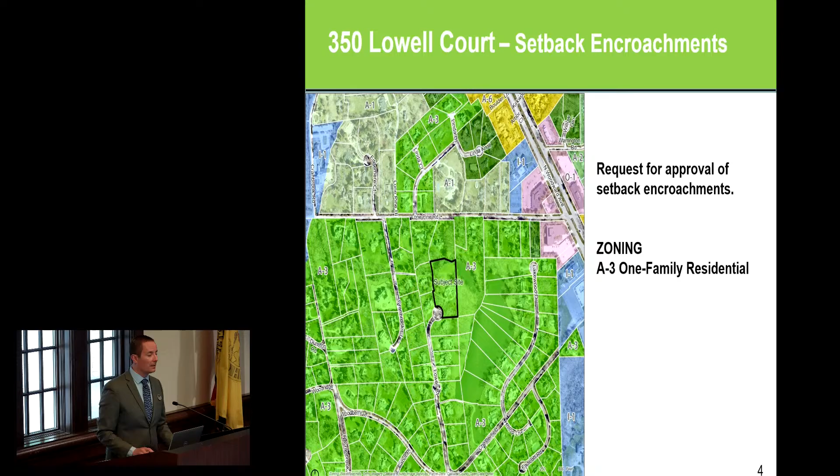Good afternoon, Mr. Chair and members of the Zoning Board. My name is Eric Peach with Giffels Webster, the city's planning consultant. Our first item for consideration is the home at 350 Lowell Court. As stated, this is for setback encroachments. The subject site is located at the end of Lowell Court at the cul-de-sac. It's zoned A3, so the A3 zoning district requirements and standards apply.

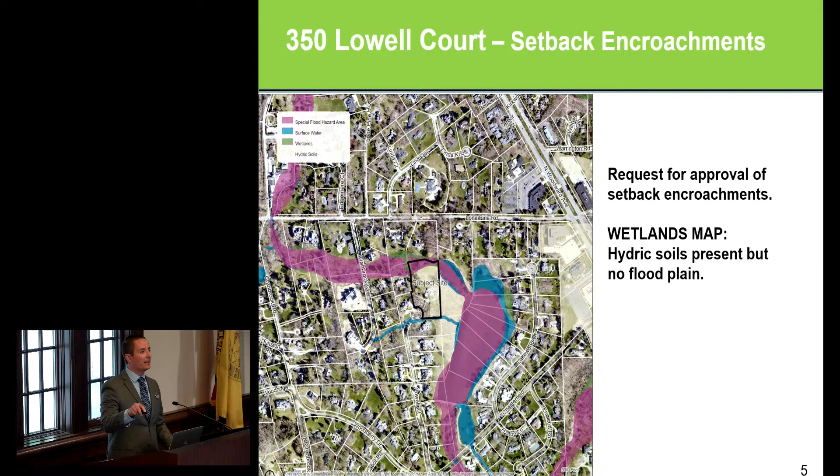An aerial of the wetlands map shows some wet activity here. Off the top of my head, I don't recall the name of the stream, but there are some hydric soils on the property as well that don't have any impact ultimately for our review. It's actually the Rouge, and just to the east is an arm of Endicott Lake, and then the lake itself further to the east.

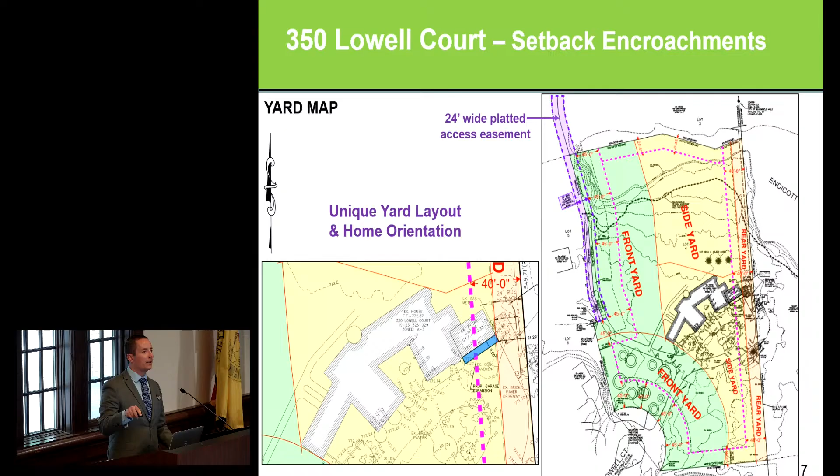It's very narrow because the existing house is in close proximity to that, creating this narrow strip of rear yard, and everything in between is the yellow shaded area, where your side yards are determined. Zooming in on the left-hand side of the screen is the area of focus. It's this existing garage that encroaches the 40-foot required rear yard setback, and this portion in blue is the proposed addition seeking approval for the portion that encroaches into the 40-foot setback.

So we apply the A3 zoning district standards to this site. The minimum setback is 40 feet, as shown on the previous image. The existing house, the existing garage, is at 23.4 feet, which is considered an existing non-conforming structure. So we have to determine if there are any impacts as the proposed addition influences that at all. With the proposed addition, that's taking the existing encroachment from 23 down to 21, because there's a slight angle with the addition that makes it slightly closer to the property line than the existing house is. That's what's before you today.

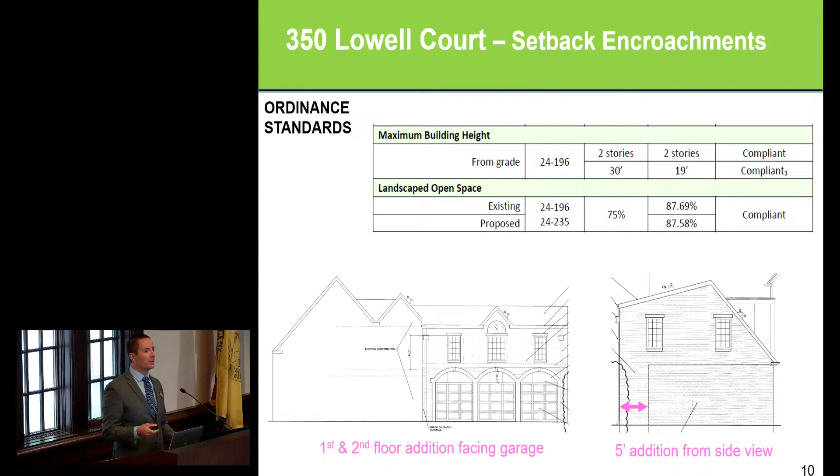The remaining standard for the A3 district is building height. We wanted to make sure that this proposed addition does not exceed the 30-foot height limit, and in fact it's only 19 feet high and matches the 2 stories of the existing home. It's a very minor addition, only 5 feet wide, as shown in this dimension here. So when you apply that to the lot coverage, it's only slightly reducing the overall open space.

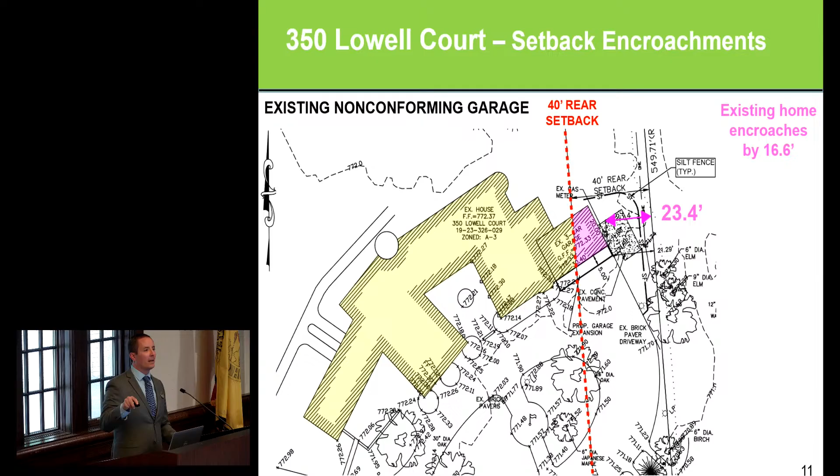And then just giving a more zoomed in, clearer version of the existing conditions. What's an existing nonconformity is highlighted in pink. It's because the 40-foot setback along the rear property line is where the encroachment's occurring, by about 16.6 feet into the setback.

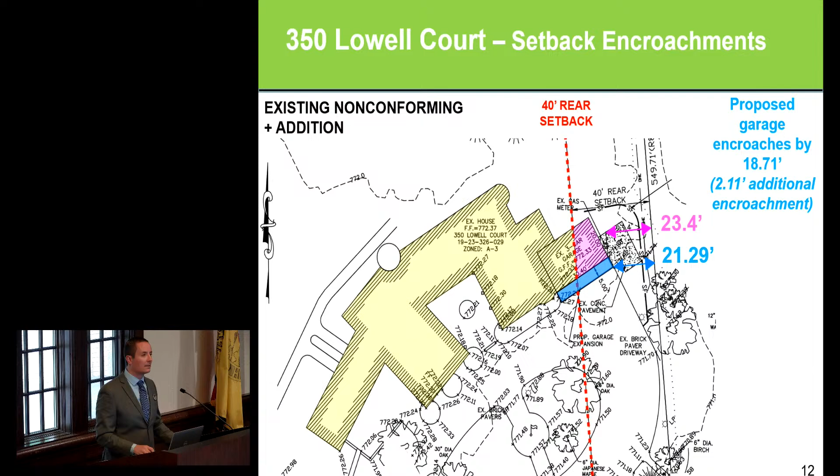Say that again, where the second—yes, ma'am. So the existing structure is shown here, and because they want to propose activity or the addition within the minimum setback of 40 feet, that's your first variance. And then when you apply the algebraic setback formula, the portion that does not comply with the formula is this portion here. So that's a second variance applied in addition to the minimum standard of the ordinance.

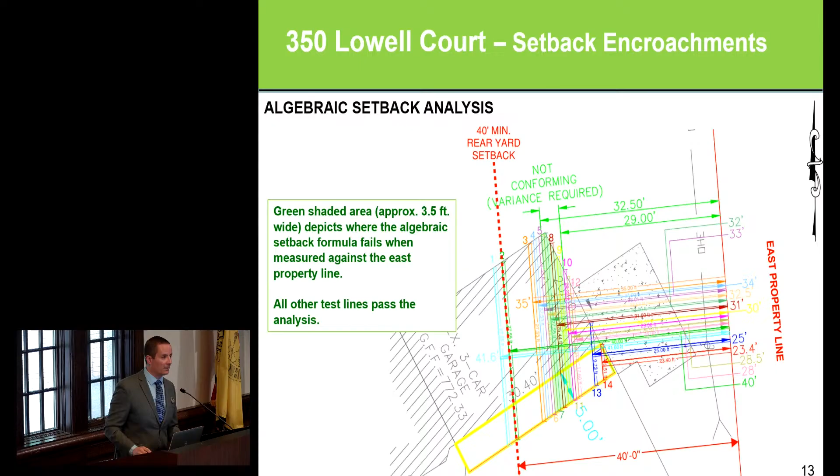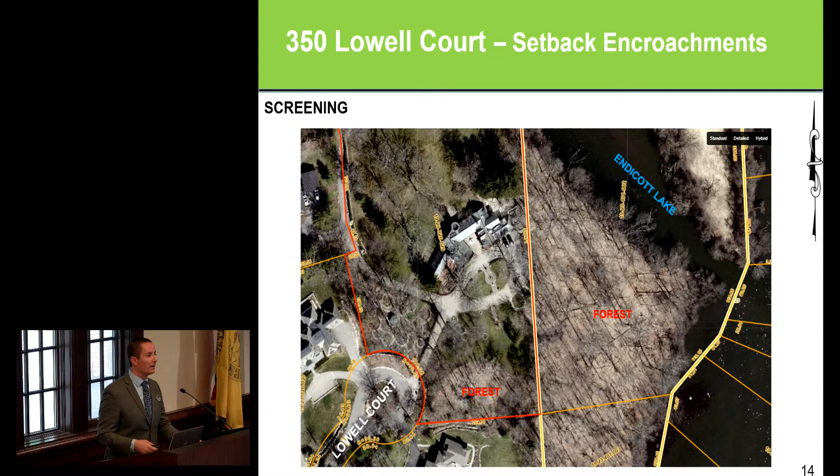That concludes my presentation. Is there any questions?

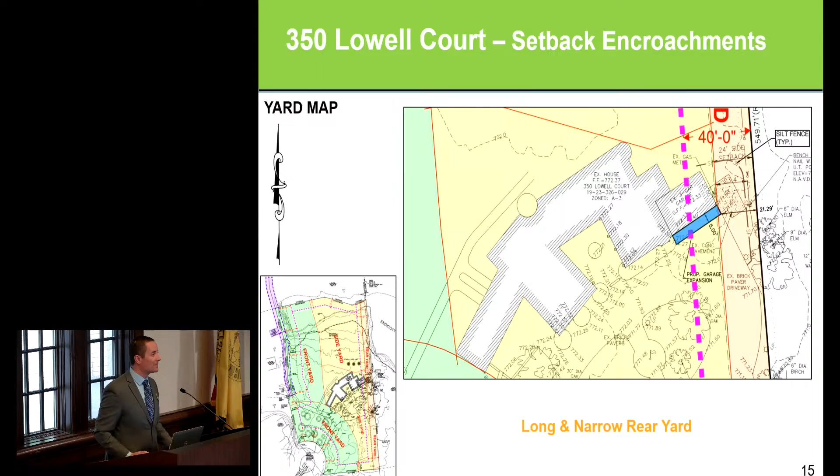The home is 100 years old, the house is old, and I happen to live in a home that's 100 years old. So they did a lot of things that you would certainly not expect, as far as borders and all that. They didn't pay much attention to it. But in this case, you basically can't fit a modern car in that garage, so they're just trying to make it long enough. That's the reason for it? Yeah, okay. They're just trying to make it long enough to put their cars in, because they live in this gorgeous house and they can't put their cars in the garage. Yeah, they never have been able to do that, which is amazing. Model Ts fit in there. Right, but not exactly.

And then, as you saw on one of the previous images with the elevation, it's also a second story. I don't have the floor plans included in the presentation, but they show that the existing floor plan on the second story extends out that same 5 feet, as you can see here. So the garage is coming out, and the second story is also coming out with it, so there's a bit of increased floor area on the second floor as well.

Any questions for Eric? Thank you.

As far as engineering, we really didn't have any concerns with this, just given the little area near the home that's added. But as we always do, we look at drainage for the property to make sure this won't negatively affect anything. Being so close to Endicott Lake, this property does naturally drain into the lake. Given just that small addition to the home, we didn't feel it was necessary to add any additional drainage items to this proposed project, but we did look at it. Obviously gutters will be put on this addition, the rest of the house, and for that part of it. So a little bit of additional roof structure getting rain, but there shouldn't be any issues.

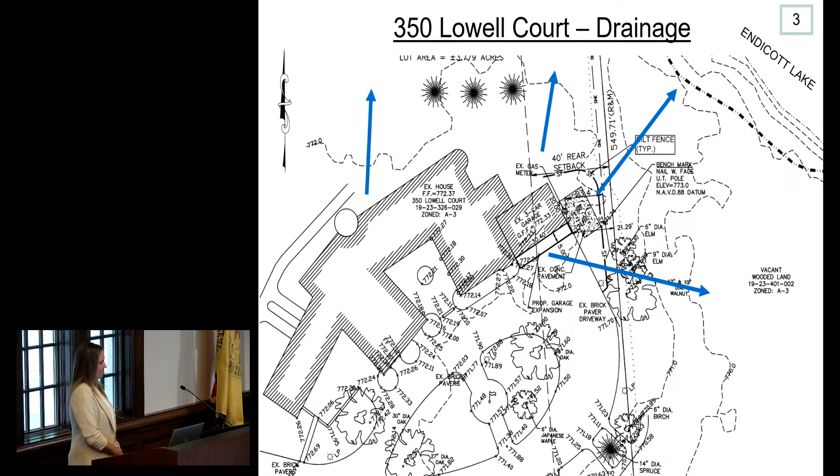All right, thank you. Is the applicant here, would like to make a comment on the application?

Good afternoon. My name is Michael Rea. I'm actually representing my parents. This is their house, Tony and Suzanne Rea. And I grew up in the house.

Essentially, as was mentioned earlier by Commissioner Miller, the reason for the addition is the existing garage is just not big enough to park their cars. My parents are both in their 80s now, and as we all know with Michigan winters, the snow and ice, it's become more of a hazard to go out and scrape the cars, the salt, the windows and snow. So that's what spurred that on.

And as stated, the house is 100 years old. That area to the east is completely wooded, especially now that the foliage has grown in. All the neighboring properties to the north, across Endicott Lake, to the east, as well as neighbors to the south and west, are completely screened in by the trees and wooded area. My father, Tony, is an architect, and went to great lengths to preserve the unique architectural style of that home as well. They don't feel that granting this variance would do any harm to any adjacent properties, and would grant them substantial justice, as it would allow them to enjoy the full use of their garage to park their cars.

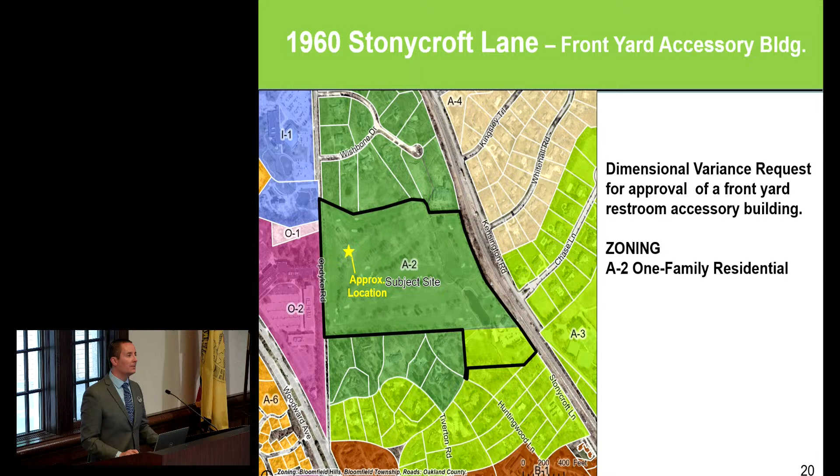This is zoned A2, split zoned actually. A portion of it is zoned A3, but the bulk of the golf course is zoned A2, where the proposed location for a bathroom facility is proposed. So this was before the Planning Commission last week.

This is an accessory building that's not a pool house or a garage. The ordinance says if it's not one of those two things, it requires Planning Commission approval. So that's why it was before them last week, where they approved the application, subject to the approval of

the Zoning Board of Appeals today. So this is before you because it's in a front yard. Accessory buildings are not permitted in front yards. Sorry, I'm skipping ahead here to the yard determination graphic.

Because there's nothing to establish the front yard off of Opdyke, the whole golf course is considered front yard. It's not until over here where we have buildings that there's side yard in this location. I thought we had a rear yard on here, but it appears that it's all front and side yard on this property. So moving our focus back out to where the proposed structure is, the proposed building.

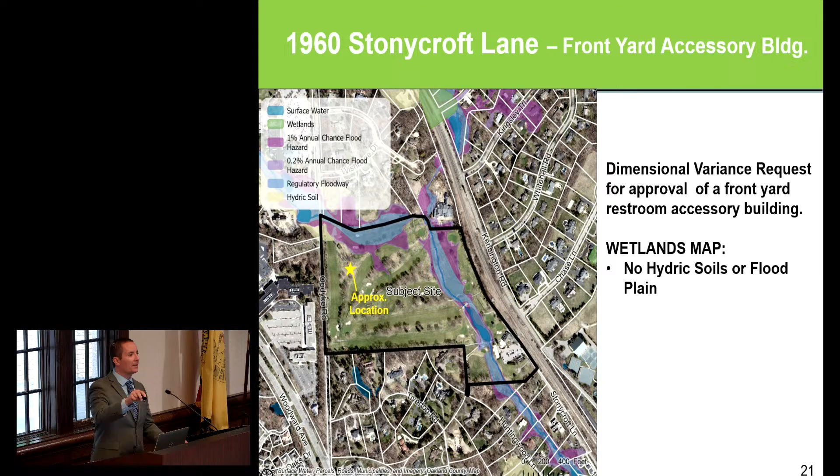Again, we have wetlands here, but nothing that's impactful to the location of where the bathroom facility is located.

Are there evergreens in back of it, where the building would be, or trees already there? There are some trees. The applicant is proposing some new trees to help with the screening off of Opdyke, but there's also existing trees off of Opdyke as well.

So we did look at the screening during the Planning Commission hearing, and we'll go over that in just a moment. If the ZBA feels it's not as adequate as they'd like, that's something you can consider today too.

The Planning Commission item, as I mentioned, has to be a garage or pool house. If it's going to be an accessory building, it's a golf course restroom. So this has been approved.

Before you again is the location. It's not encroaching any setbacks. We'll go over that in a second. It's just the fact that it's within the front yard.

Off of Opdyke, highlighted in yellow on the left side of the screen, it's about 213 feet from the Opdyke right-of-way. And with a focus to the north—sorry, I made a mistake and didn't fix the error—it's in excess of 300 feet to the north, which is where you have your single-family residential neighborhood.

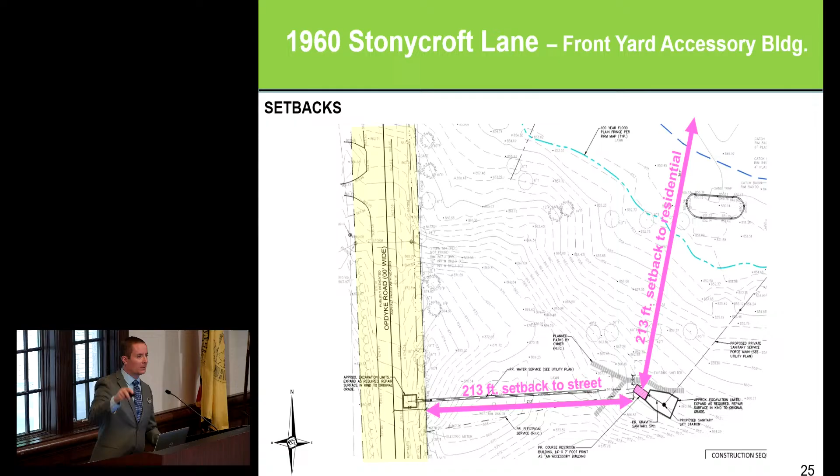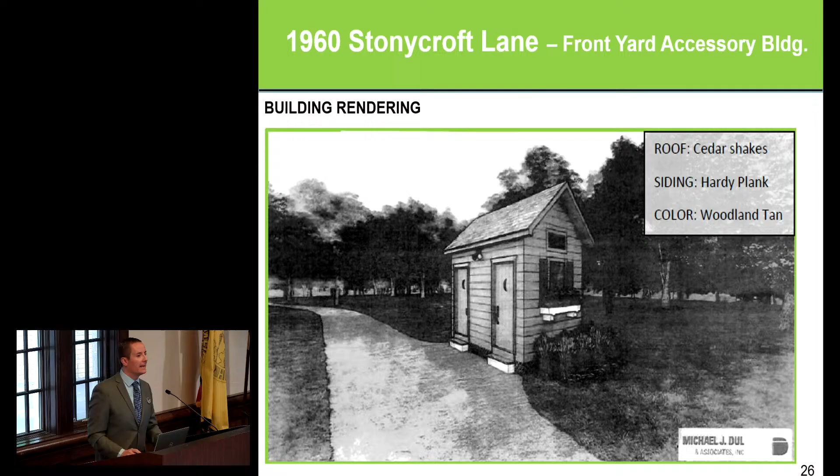This is a nice little rendering of what it would look like. It's only 7 feet by 14 feet in dimension. The roof is cedar shakes, the siding is Hardy Plank, and the color would be woodland tan. So it'd be a very natural appearance to the surroundings.

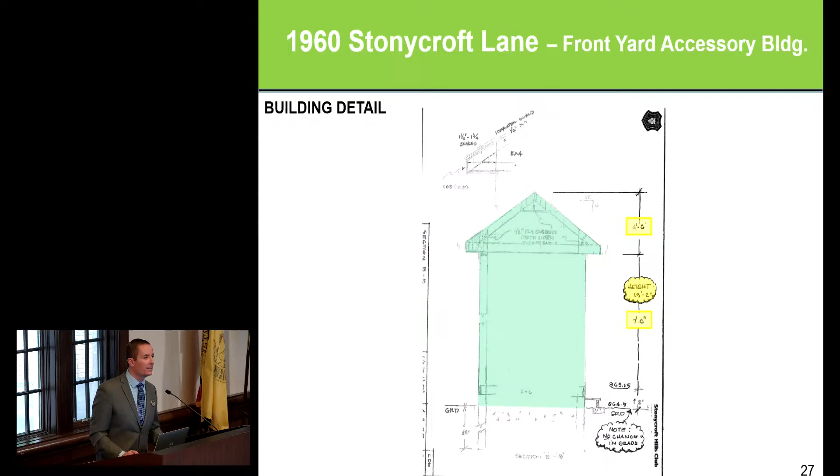And then this is just the building detail. It's approximately 13 feet 2 inches maximum height. Accessory buildings are restricted to 14 feet in height, measured to the midpoint of the roof, so this falls comfortably within that limit.

Looking at the landscape screening, I highlighted some of the existing trees along Opdyke, but again, it's in excess of 200 feet to the facility itself, and there's some additional evergreen screening in terms of arborvitae that will help soften the views from Opdyke. But there would be no views of the structure or the building from the north or any other direction, just because it's so far from other property lines.

There was a bit of discussion at the Planning Commission meeting. They did subject their approval to, like I said, the ZBA's consideration. Yeah, it was the easement to the property to the north, right?

And so the applicant will be continuing to work with that property to tie in a utility connection. I believe it's to sewer, to the property to the north, which is where the easement is, and it would be up in this location here.

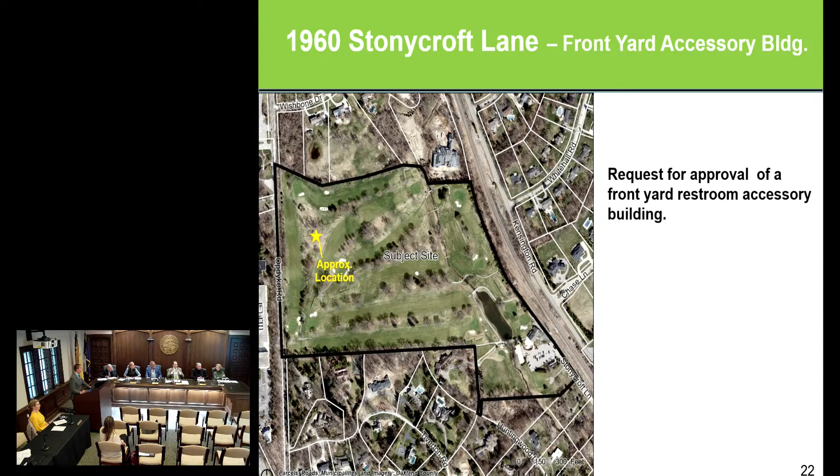And has that property owner completed the preparation of that easement agreement? I think it was still kind of in the works. I don't have any new information on that. Can the applicant speak to that? There was a letter in the packet, yes, that's the one being referred to—that the property owner to the north is granting access. So there's an approval from that property owner? Yes. So that concludes my presentation.

Again, it's because it's located in a front yard, which in this case is kind of hard to avoid, and so that's the reason it's before you. There's no issue with setbacks.

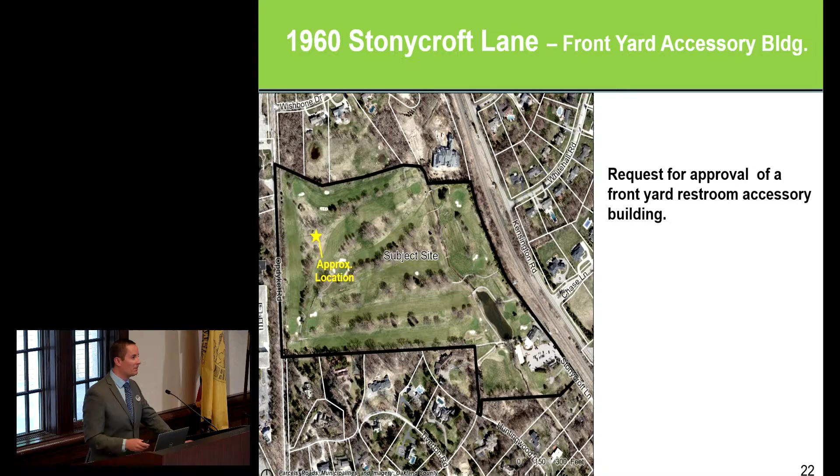So Leah, you want to? Any questions for Eric? Thank you.

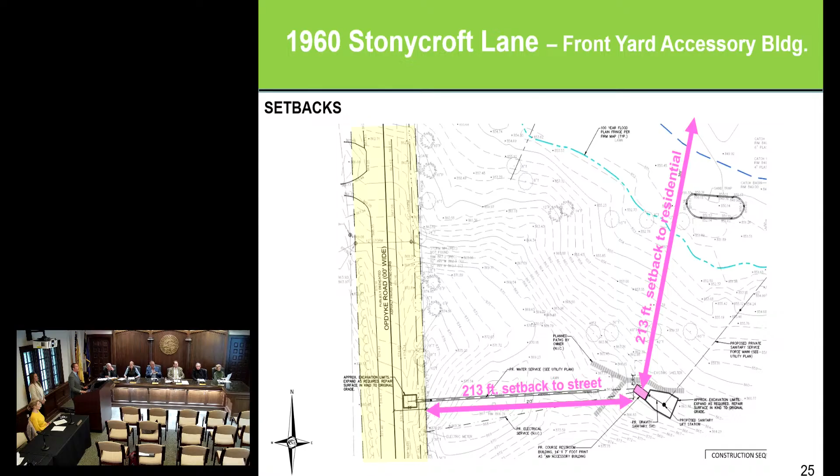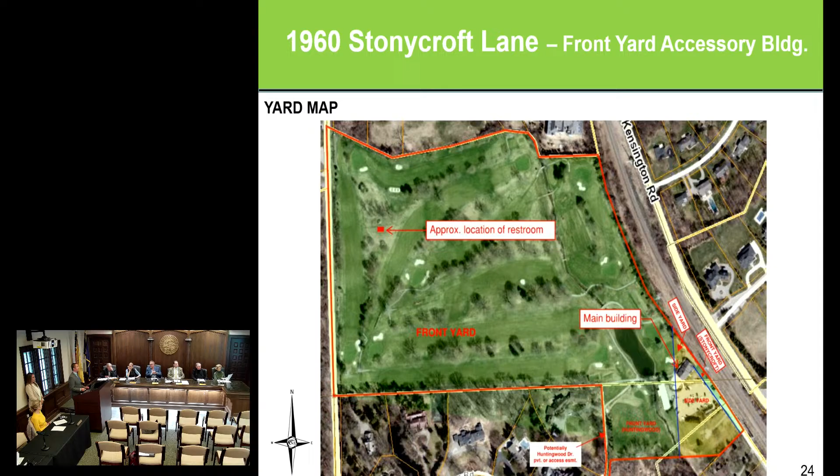Am I to understand the properties to the north don't see this building at all from where they are? That is the thought. There's a line of trees here, and again, that's about 200 or so feet. There's a little bit here—I can't speak to that affirmatively, but it's the distance that makes it so that it's not like a building that's right up to the property line.

And then the trees that they are planting are to the west, so that's more towards the Opdyke.

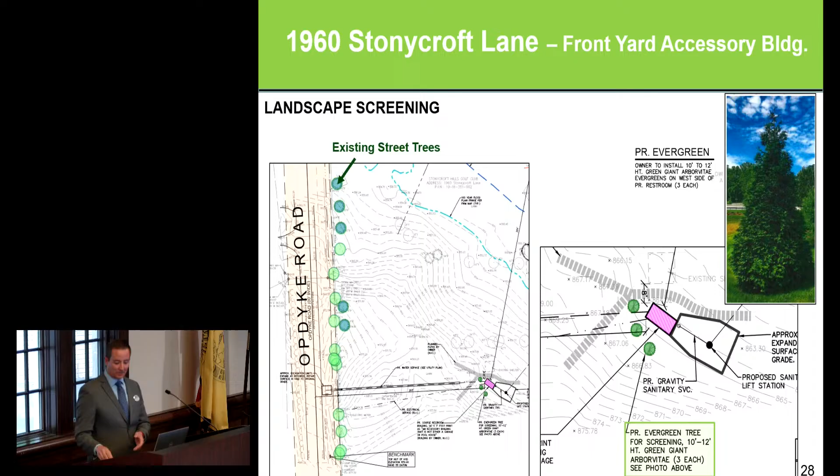So the current temporary porta potties get pulled out? That is correct.

Any more questions for Eric?

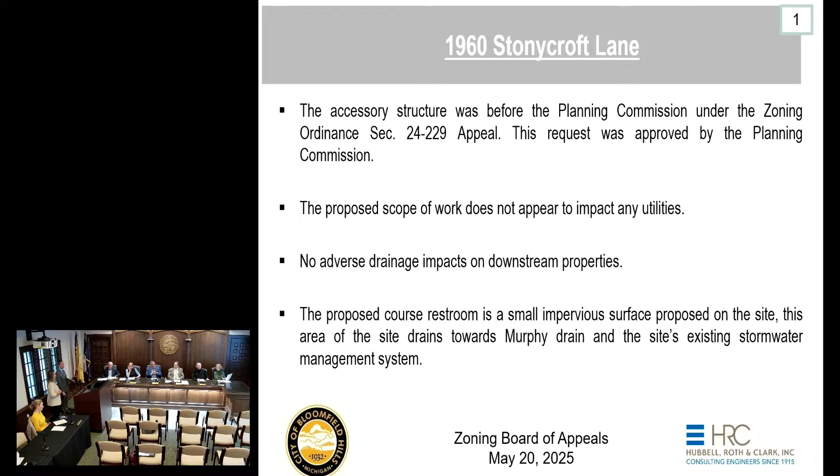So from an engineering standpoint, again, we look at drainage, but given that the property, the golf course itself does have its own stormwater management system, and it does have the Murphy drain nearby, which collects water, the small addition of impervious area, we do not feel would be negatively affecting the property or neighboring properties.

As mentioned, they will be working with EGLE and WRC to maintain the proper permits to tap into existing sanitary sewer nearby and on the property to the north. So we've been working with them to review their plans, but as far as engineering goes, we don't see any issues with what they're proposing.

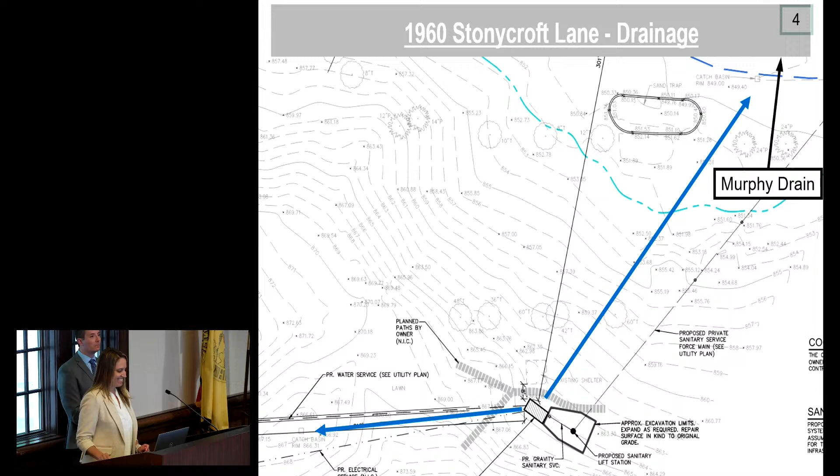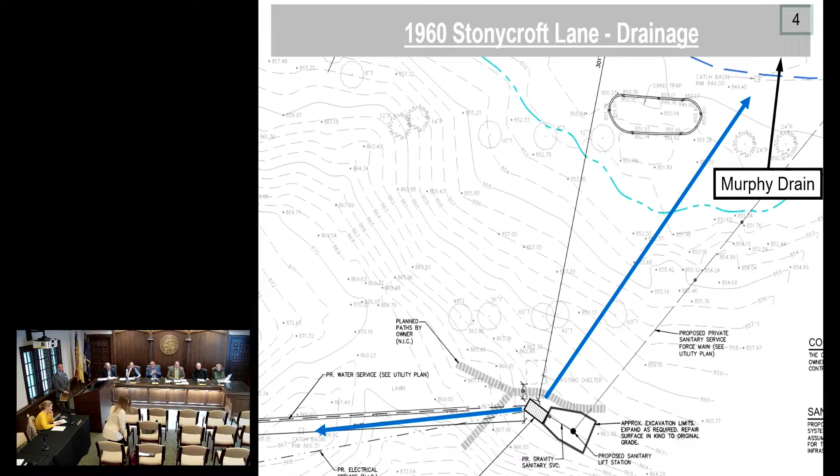Thank you. Any questions for Leah? Thank you. Does the applicant have any comments, questions, or would like to supplement the presentation? No. Okay. No. Smart people.

Well, given that, and knowledge of the two conditions, does anybody have a motion they'd like to make?

I was wondering, is it going to be treed so it can't be seen from the building, can't be seen from the houses to the north? Like a motion?

Sure, just make sure the motion includes the two. I see there's an existing shelter that nobody brought up that would screen the building from houses to the north as well.

Is it like a lightning shelter for inclement weather? Is that a question? Yeah, well, I'm asking. So there is a current shelter, and you are correct, that's for inclement weather. It's a storm shelter, so if somebody's on number 7, it gives them some reprieve.

Okay, so that blocks it as well, besides the trees there, so I don't think there's any issues with the houses to the north at all. With the trees and foliage and the existing shelter, it's a non-issue.

Okay, any other discussion? Anyone make a motion? I'll make a motion. Okay, I move to approve a variance from section 24 to 29 to allow a course restroom to be sited in the front yard of this property.